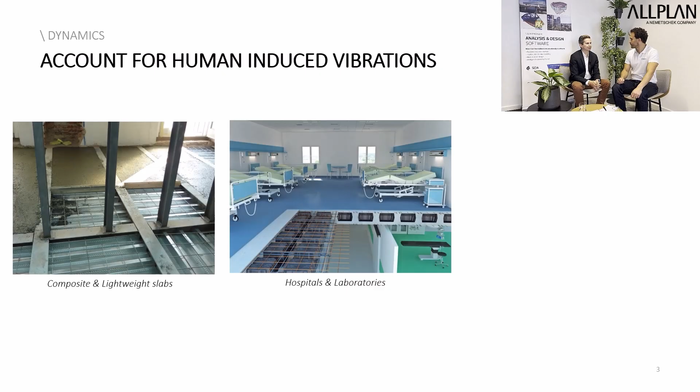How did we tackle them, and what is your impression over this topic? Yes, in Scia Engineer version 26, we face some of this problem and we try to bring new solutions. One of the first problems that we want to challenge is human-induced vibration in buildings. As you mentioned, the slabs are becoming more and more lightweight, made of composite, sometimes with wood, sometimes voided slab. And the lighter the slab, the easier the possibility to incur vibration induced by human activity, people that are in offices or people that walk into the corridor of a hotel, which is the problem in this case. The problem is that a situation of discomfort for the people can be created due to the human-induced vibration, and also the serviceability limits of the building itself are surpassed.

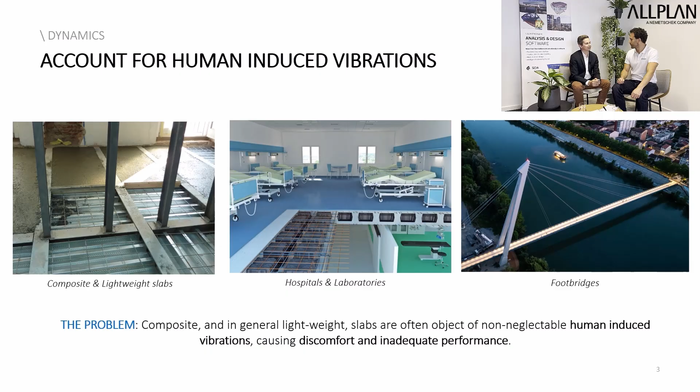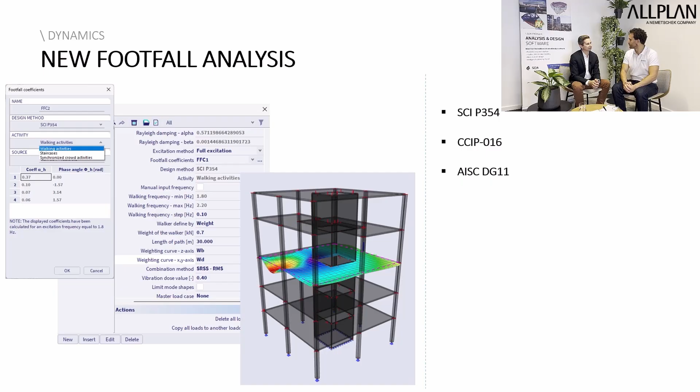How to deal with this? In Scia Engineer version 26, we introduced the new footfall analysis. This allows already in the design phase to predict the behavior, the vibration that will occur in the building due to human activity. It's an approach based on design codes, based on code SCI, AISC, and CCIP. So we cover the three main codes dealing with human-induced vibration. It will enable the engineer to extract directly meaningful values like response factor and vibration dose value. And why is it important?

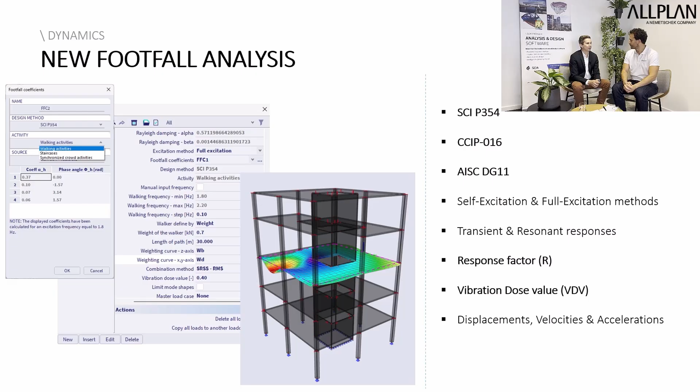It's important because too often in practice these problems are discovered once the structure, the building, is already operational. But with the possibility to do this already in the design phase, the problem can be predicted, enabling the possibility to avoid expensive and costly retrofitting action. Again, it's something that is very important for structures made of composite slabs, lightweight slabs in general, but also for buildings of particular use, like hospitals, scientific laboratories, and as well as for footbridges. So I think it's a very nice novelty in Scia Engineer version 26.

Definitely, that looks like an impressive solution for this type of problem. We saw in the last slide a typical structure that our engineers deal with, a multi-story building with lightweight slab. Now the problem is punching with walls, with columns. What are the solutions that we offer for that?

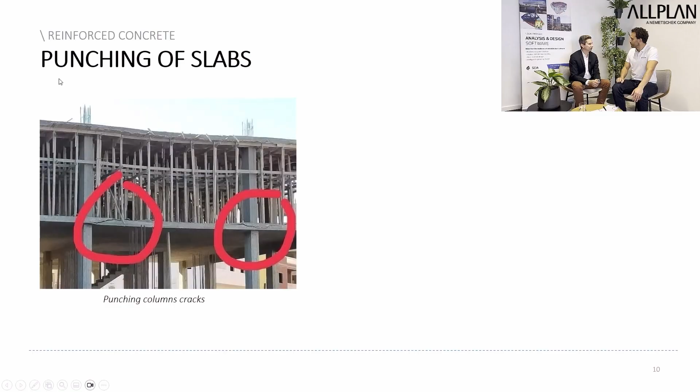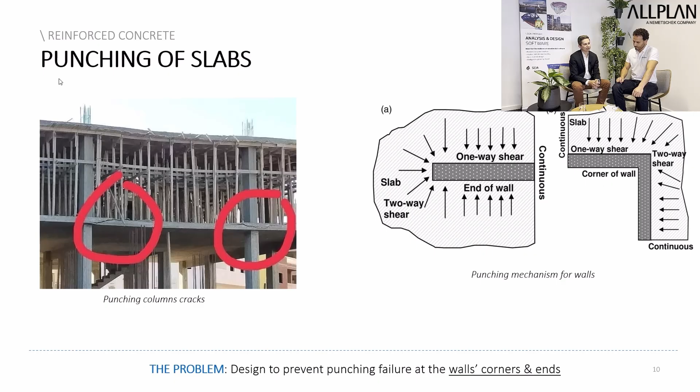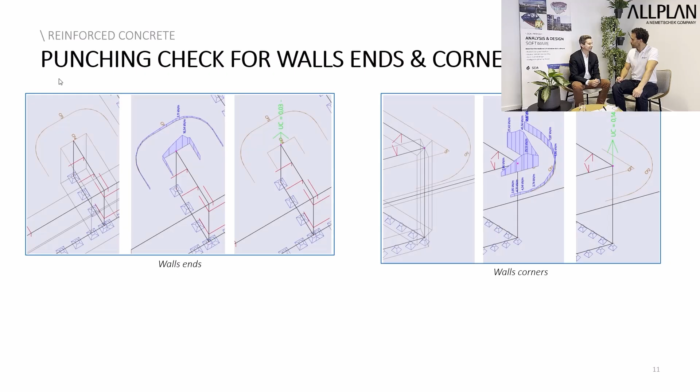The problem of punching of slabs is one that can very quickly be neglected in the design phase. We already had in Scia Engineer until now the possibility to perform design and check of punching with respect to columns of circular and square shape. In Scia Engineer version 26, we extend these capabilities, and now we are able to design and check for punching with respect to wall corners, wall ends, and also with respect to columns of any cross-section shape. So we are able to cover the entire spectrum of punching possibilities for reinforced concrete buildings.

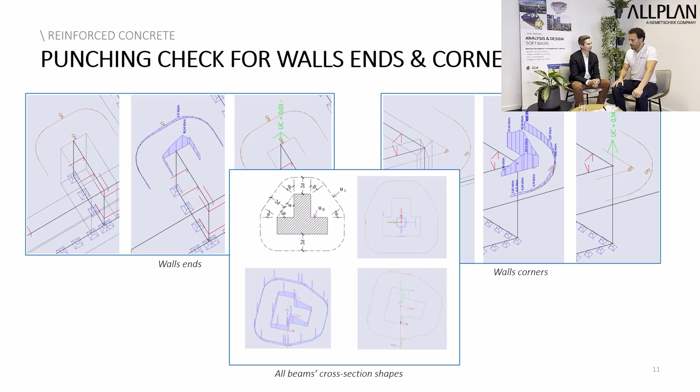That's for sure a fantastic improvement that we propose to our users. Going back a bit to the footfall analysis, we mentioned the problem with lightweight structures, we also saw the Millennium Bridge, which is one of the most iconic cases. But going on then to civil structures, what are the news that we can share with our users?

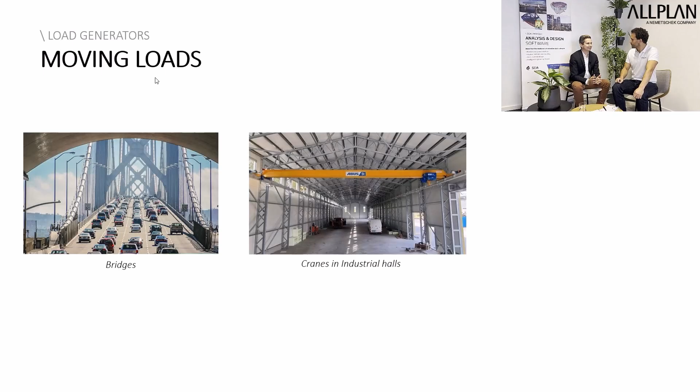The domain of civil structures is one that we care particularly about. In version 26, we introduced two main novelties in this sense. The first one is moving loads. What is the problem with moving loads? Every time you have loads that can assume different positions in space, it's very easy to end up with a huge number of load combinations. This implies that the computational time becomes huge, as well as the time for post-processing.

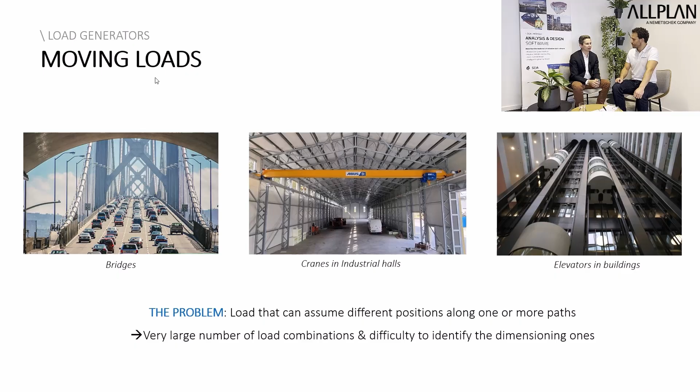So how to solve this problem? We solve it using the mathematical theory of influence lines and influence surfaces. What is that? It's the possibility to compute a priori, via mathematical functions, the position of the loads that generates the worst case scenario with respect to the response we are looking for, like moment, displacement, reaction, and so on. What does this imply?

This implies the possibility for the user to identify a priori, among the millions of possible load combinations, the few load combinations that are the designing ones, the worst case scenario, and then to perform the finite element analysis and post-processing only for this limited amount of load combinations.

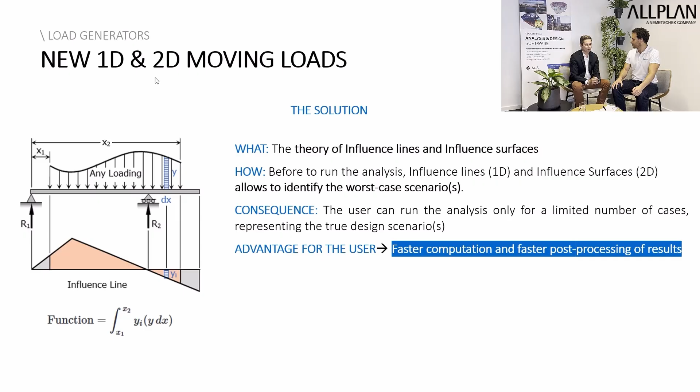This will generate a huge saving in timing for computation and for post-processing. In Scia Engineer version 26, we introduced this feature both for 1D elements and for 2D elements, so surfaces. The implementation is very complete and sophisticated.

There is the possibility to use all the load library coming from design codes, and to synchronize or not the load across different tracks. There is also the possibility to use a diffusion cone for the load on the surface, to take into account the effective depths of the slabs. The user can use this feature for bridges, for people designing industrial buildings, for cranes that move along the buildings, for taking into account the effect of lifts and elevators in high-rise buildings, and others.

So it's a very nice implementation for a user.

Congratulations, I think it's also a really strong approach to save time, especially in the post-processing phase, where I think one of the challenges is dealing with this type of structure.

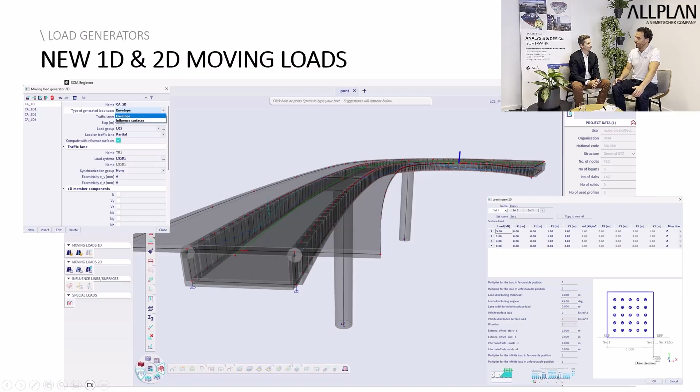Staying on civil structures, we are talking about moving loads, and also about retrofitting. Loads are changing, challenges are there, and also new approaches. Luckily we have an improvement in the software, but this means we also need to go back to existing structures and deal with them. What are our solutions and key points on this topic?

If you look around, most of the structures that are built are old, not new ones. Most of the buildings or civil structures out there made of concrete are more than 50 years old, and sometimes they are approaching 100 years old, so they are at the end of their design lifespan.

So the challenge here is what we do with the structure. We demolish them and build new, which costs really a lot, or we try to see if we can extend the lifespan of the structure. In this last case, what we look for is a solution for retrofitting.

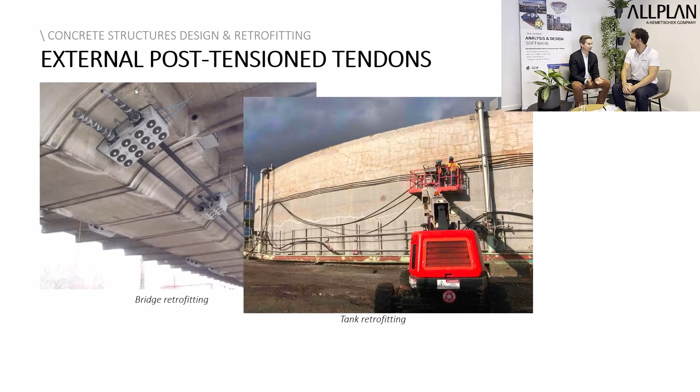One of the main solutions for retrofitting reinforced concrete structures is the use of post-tensioned external tendons. They are used because they are cheap, easy to put in place, and not invasive. Until yesterday, we were not able to simulate their behavior with Scia Engineer, but starting version 26, we are able to model, analyze and design with respect to post-tensioned external tendons.

Moreover, this implementation is fully compatible with construction stages, so people who design and analyze more challenging structures can really take advantage of the combination of post-tensioned external tendons and construction stages, in order to figure out the whole pre-stressing workflow.

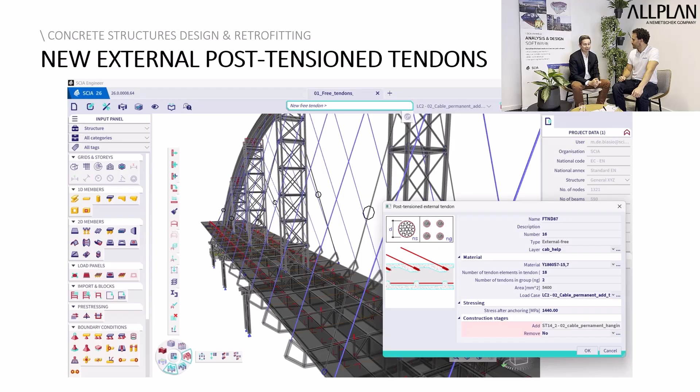I think there's also a small surprise, as you mentioned construction stages. There is a small improvement, but it was asked by many people: the possibility to reuse variable load cases on multiple phases.

Until yesterday, if a user had several phases and defined variable load cases, once used in one phase, he could not find them anymore in other phases, so he had to redefine them. Now, if the variable cases are used in more phases, the user can freely reuse them, just like a standard load combination.

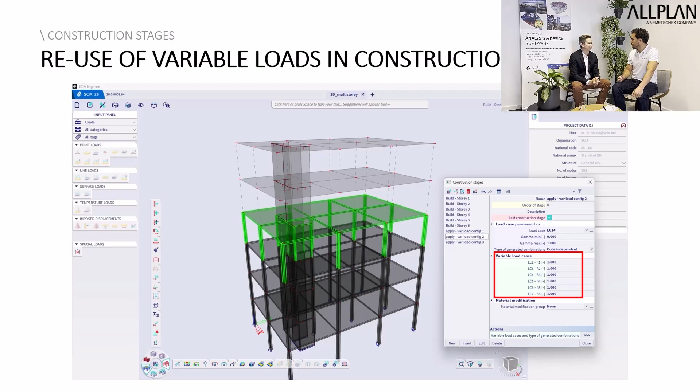Going back a bit to moving loads, we talked about moving loads on 2D elements, but mobile load on 1D elements is also important. This can definitely be a feature used in frame structures, talking about cranes, for example. But going to the frame structure brings other challenges and obstacles to our engineers, because we need to simulate the right behavior.

There is an important aspect that is sometimes a bit overlooked: the aspect of torsion. What can we say about that, and what is our solution to this challenge?

The problem of torsion is very important, because even if the user sometimes tends to underestimate this phenomenon, it always exists. As soon as there is an eccentricity in a load that is not applied exactly on the axis of the element as designed for, or an eccentricity in the support, there is torsion. So torsion is practically present every time.

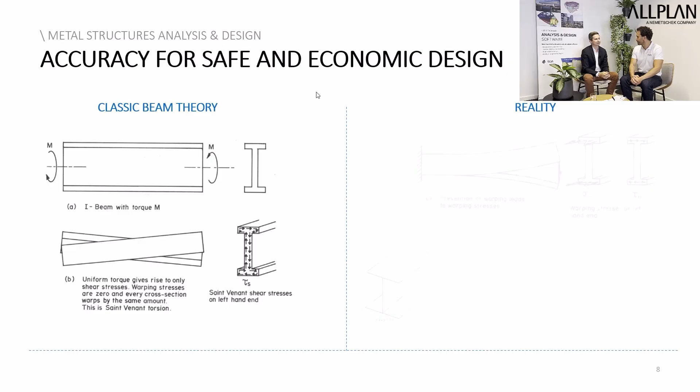What is the problem of torsion for 1D elements? The problem comes from the base, from the beam theory used in the formulation of standard finite elements. This is because this theory totally neglects the phenomenon of warping that is present in reality. Warping is the fact that the cross-section deforms along the axial axis of the structure.

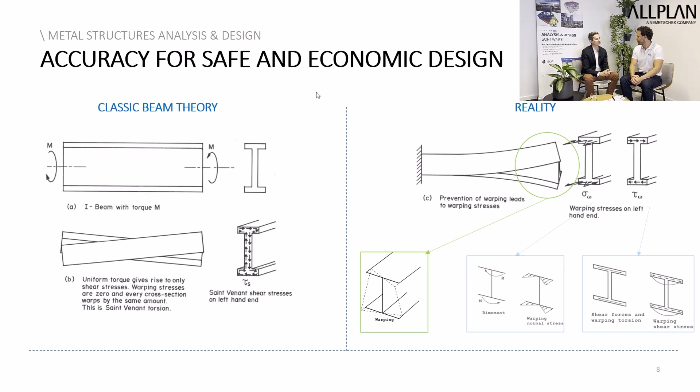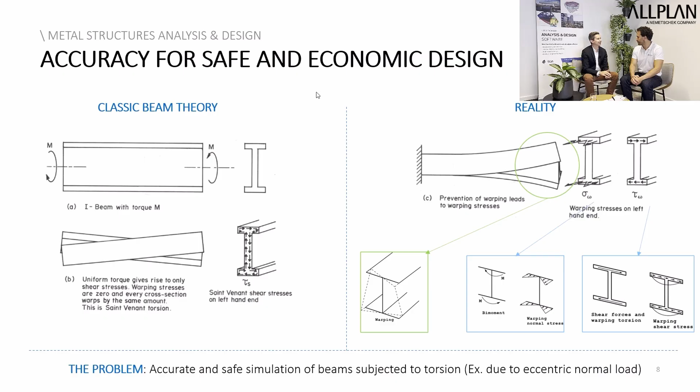Deforming in this direction implies the creation of a new component of stresses. Now, how to deal with this? We can deal with this, and we do it in Scia Engineer version 26, through the adoption of a new finite element formulation that incorporates an additional degree of freedom that takes into account the deformation of warping.

The result is the possibility to do a more accurate simulation of reality, having safer results and more accurate predictions, and sometimes this translates into a more economical design.

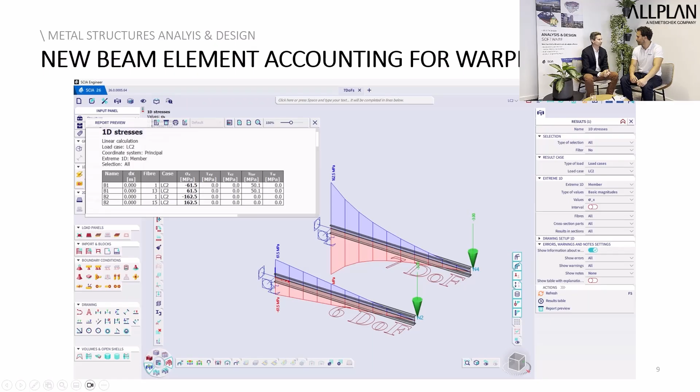But there is also another practical advantage: if a user uses a finite element beam with 7 degrees of freedom, they are entitled to skip the design checks for lateral torsional buckling, because the Eurocode clearly states that if warping is explicitly taken into account by the numerical simulation, there is no need to perform a check for lateral torsional buckling. This can be very complex to do with the formulas of the code, so this can be very beneficial in terms of time saving for the user.

I think you really touched a key point, not only for today but for the progress of the code. We are talking about Eurocode, but there's a new Eurocode approaching, the second generation Eurocode. There, engineers will be faced with new challenges and new calculations. I think the 7 degrees of freedom will offer an important solution to avoid manual calculation, where the risk of error is much higher, and also to have a more deep and advanced analysis of the structure.

And I think we are already looking at the second generation Eurocode, right? Yes, indeed. The new generation of Eurocode, the second one, is approaching, the release date is approaching, and at ALLPLAN we have already been looking at it for several years. There is something already ready in the software that users can use directly in Scia version 26: the second generation Eurocode for steel standard and for cold formed steel. As for the other second generation Eurocode chapters, the work is ongoing and will be ready. We will release it progressively every time we finish some part of it.

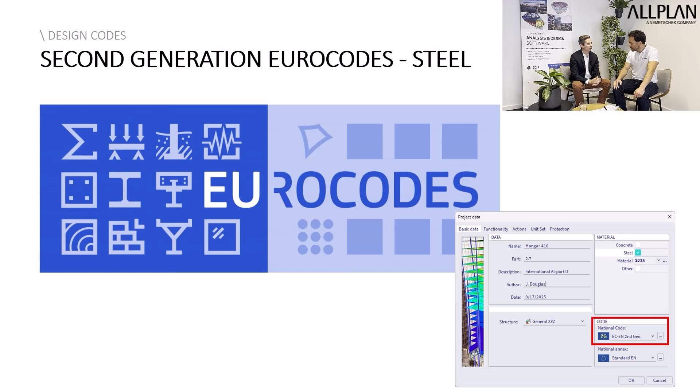Speaking about codes, there are also some novelties in Scia Engineer version 26, such as the introduction in the 3D wind load generator of the American code ASCE 7-22, the latest iteration of the American code for wind loads. We introduced it in the wind load generator, and at the same time we kept the old iteration of the ASCE 7 code, so that users designing a structure for the US can pick which iteration of the code they want based on which state they are designing for, because each state in the US uses a different current version of the code. It's not always the latest one that is used in every state.

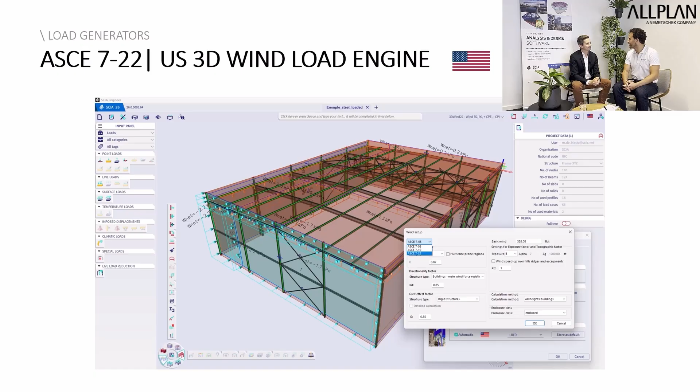That's a really good solution for all the challenges in the US code. But I think for the wind load generator there are also some news for the Eurocode, right?

Indeed, there are two. The wind load generator is an aspect of the software that is really requested, and improvements are asked all the time. We did two new things in Scia Engineer version 26. The first one concerns Germany: besides the wind zones 1, 2, 3, 4 that we were already covering, we introduced the mixed zone, so the inland and the coastal zone, in order to have full coverage of the German territory.

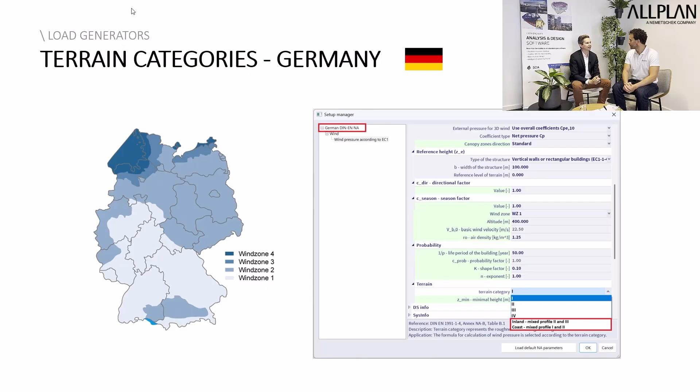The other improvement is more general, concerning the 3D wind load generator for canopy roofs, in particular for the use of the load generator with the force coefficient approach. Until now, we were considering a limited number of possible wind direction cases. Starting with Scia Engineer version 26, we cover all the possible cases specified by Eurocode for wind load with the CF approach, so that the user can be sure that their design will always be as safe and accurate as possible.

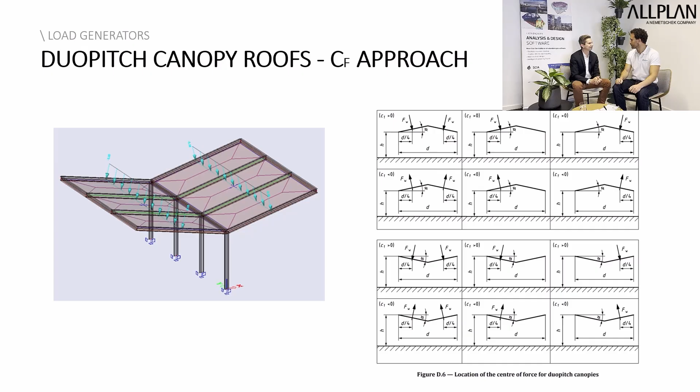Wonderful. I think we did the tour of this new release. So with just a few words, now we can start to work with mobile loads, analyze civil structures, frame structures, going into depth and start using the second generation Eurocode. We can use Scia for retrofitting civil structures and all the structures that we want to renew.

We have a solution for punching that was impressive as well, covering the full spectrum of punching shear. And footfall, I think it was one of the most impressive solutions that we give to our users. So I think it's time to start having a look at version 26, and we wish you a great day.